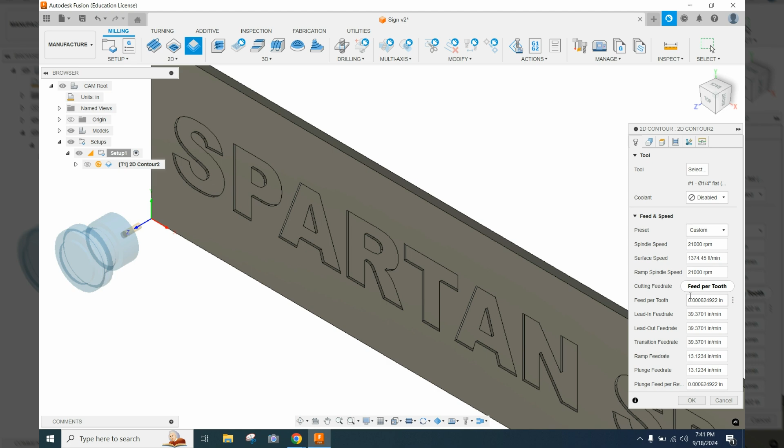Just to recap quickly, right before I got cut off, we picked our tool at a 1/4 inch flat end mill. We disabled the coolant, sped the spindle speed up to 21,000 RPMs, and confirmed the cutting feed rate was just under 40. We're going to run with that for this one.

So then we went to the second tab, and I actually misled you on that second tab. We don't want to pick a face contour. We want to click on this drop down, and we want to pick a pocket.

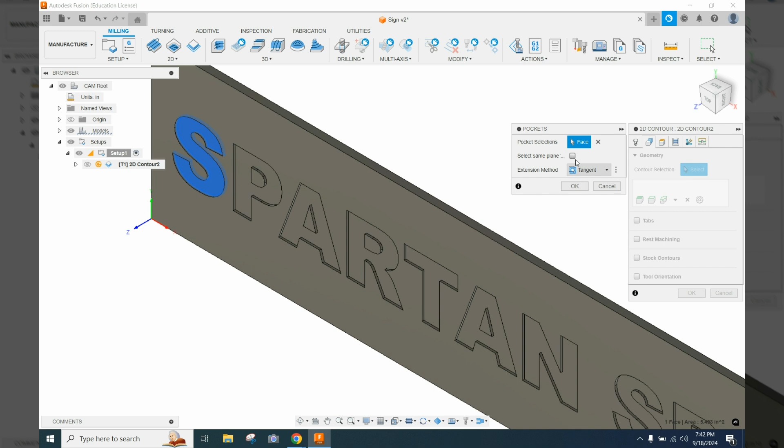So I'm going to click on pocket, and then click the bottom of this S. I want to see, it used to let me pick stuff. Oh, here we go, on the same plane. So I just need to pick the bottom of that S, and it'll pick all these other letters on the same plane for me.

And like on the P and the A, it should leave those center sections alone because they're on a slightly higher plane. Okay, we're going to skip over this heights tab. If we wanted to change the depth we were cutting, but not change our design, we could fool around with some things there. We don't need that for this intro video.

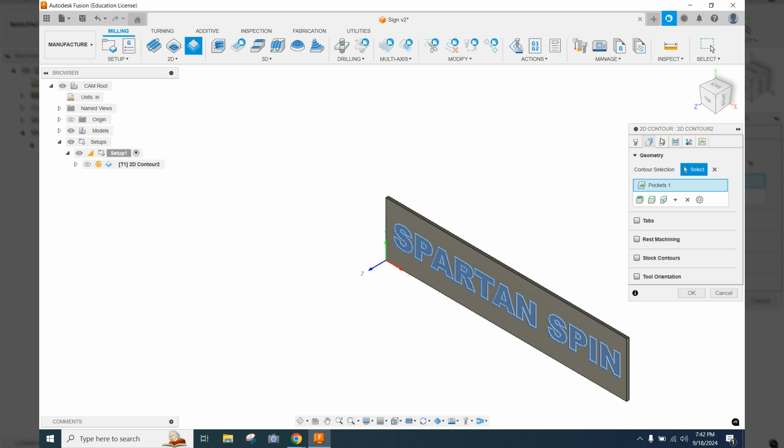Oh, before I can leave the contour tab, I do need to click OK. All right, so we're going to skip over heights. We're going to go to passes. And actually, we don't really need to do anything here.

Sometimes we'll set multiple depths. Let me uncheck that now. If I hover over here, it'll show you what multiple depths does. This allows me to cut, if we were going to a real deep depth, by stepping down and making a few passes. We're only going to cut into this plastic 1/10 of an inch, so I think one pass is fine.

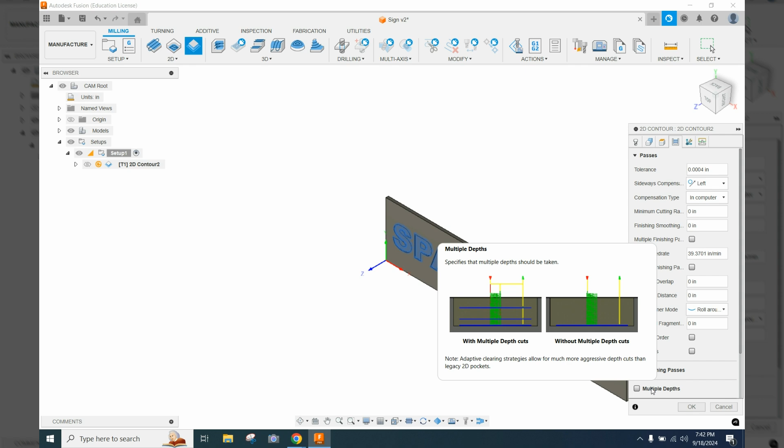Okay, this multi-axis is a new one. Our CNC router is a 3-axis router, so we don't need to worry about that.

Then we're going to come down to the linking tab, and where it says leads and transitions, we're going to turn off our lead in and turn off our lead out. If you've used the plasma cutter before, you know a lead in and a lead out is where it kind of curves into the geometry we want to cut. We don't want that with this. We want that router bit to plunge right straight down and cut.

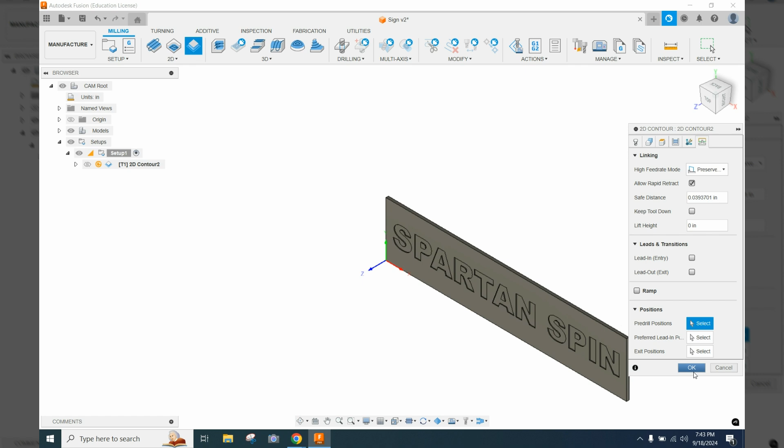So now that we've done that, I think we've got our toolpath ready to preview here. So let's click the OK button. We'll let our computer think.

And now on my screen, you can see a couple things. There's some blue lines showing up—that's the center of our 1/4 inch cutting bit, the path it's going to follow. There's some yellow lines—that's where the router is going to lift up and travel in space. And there's this ghosted looking cylinder with a red triangle at the bottom of it. That represents the cutting head of the CNC router.

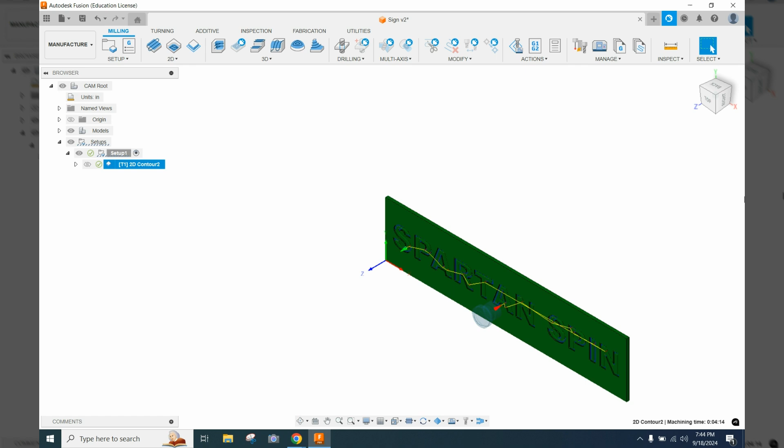So I can quickly preview this here again by clicking the top button. If I zoom in, I can start to see the tool path it's going to follow, but it's not super clear. So I'm going to go back to a 3D view. I'm going to use my roller ball to zoom out and pan over a little bit. And again, I can kind of see what's going on here in this 3D view, but not super clear. So I'm going to come to the simulate with machine button now.

I've got some things checked and unchecked here. Make sure when you're in here you've got stock turned on, right? That represents what my board's going to look like when the router starts. Then I can hit this play button, which will show me the letters in order that the router is going to cut out.

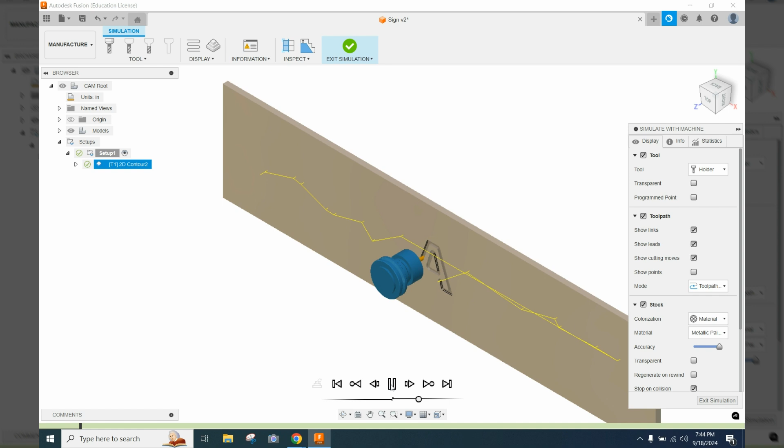While this is cutting, we can check out this info tab. This tells me what direction it's at, and I can watch the Z position to see when it's cutting into the material. It's a minus 1/10 inch, which tells me how deep it's cutting.

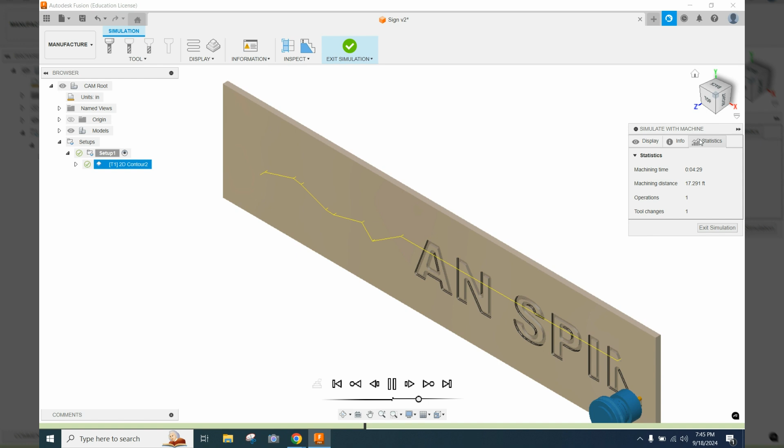The other thing we can check out here is the statistics. This tells me that when it's running at full speed, it's going to take 4 minutes and 29 seconds to follow this tool path on the CNC router next door.

I'm going to go to the next operation, and it'll speed this up and finish engraving my sign. I like what I've got here. This looks pretty good to me.

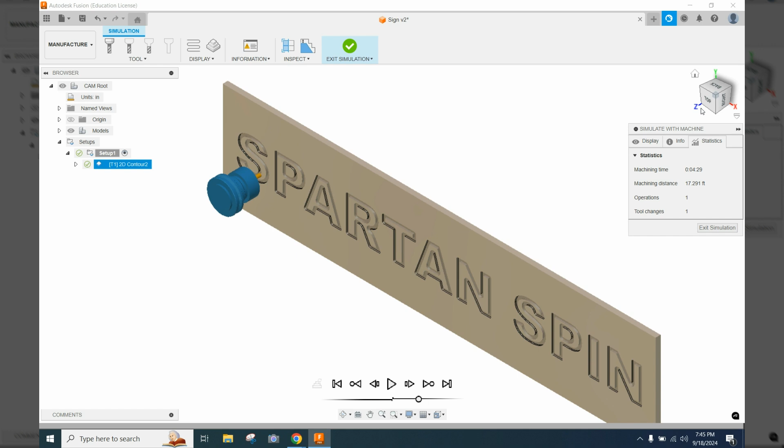If you're not happy with the way this cut out, we can do some editing, but I'd say come see me at that point because I don't want to cover every situation in this video. I like what I got, so I'm going to exit my simulation.

The last thing we need to do is turn this tool path we just generated into some G code that we can program the router with. So I'm going to click on this post-process button now.

Where it says post, I want a Mach 3 mill. If it's not there, I think there's a button over here you can click to access the library, and you should be able to find the Mach 3 mill. If you can't, come see me and I can cover that. I can't show you because it's already installed on mine.

The CNC machine wants to name everything by numbers, which gets confusing for our class. So instead of calling this 1001, we're going to call it the spin sign. Maybe you want a more descriptive name than that, feel free.

For your output folder here, you're going to plug a USB drive into your computer and output to that.

Then the last thing we want to do, over here where it says safe retracts, yours might be closed up right now. Hit that safe retracts, and we're going to set it to G28. Our router seems to run best when we use a G28 versus a G53 for that.

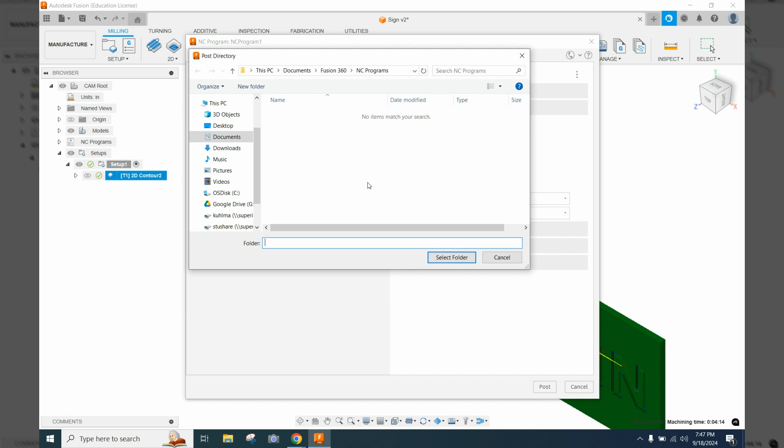So I'm going to save this to my desktop. I know I just told you to save it to a USB drive, but I'm going to save it to my desktop so you can see what's happening here when we finish this. We're going to hit the post button, which is like our save as, and it says it's been successfully done. We can view our code by coming over here.

This is all that G code that you just generated. It's telling the router which X, Y, and sometimes Z coordinates it needs to move between to cut out that sign. If you've got to this point, you've got pages upon pages of G code saved here. You can take that USB drive, find your instructor, and we will get this set up next door in the shop.